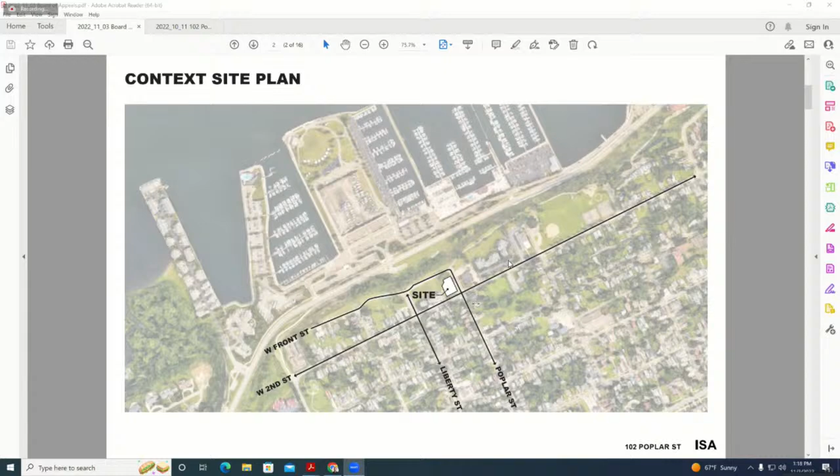I'll give a few slides for context of where the site and property is. This is the location of the site, in the waterfront district between 2nd and Front Street. It is these 4 parcels which have been consolidated. The issue we have is that the northernmost property line abuts this large property marked 400, owned by the Port Authority of Erie.

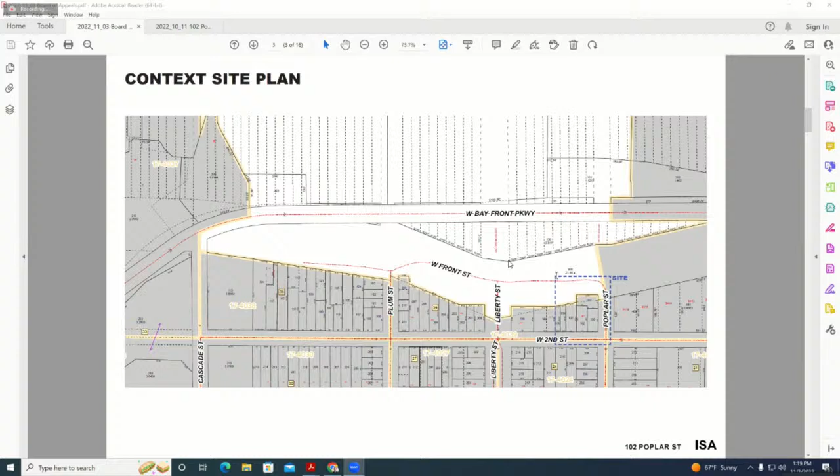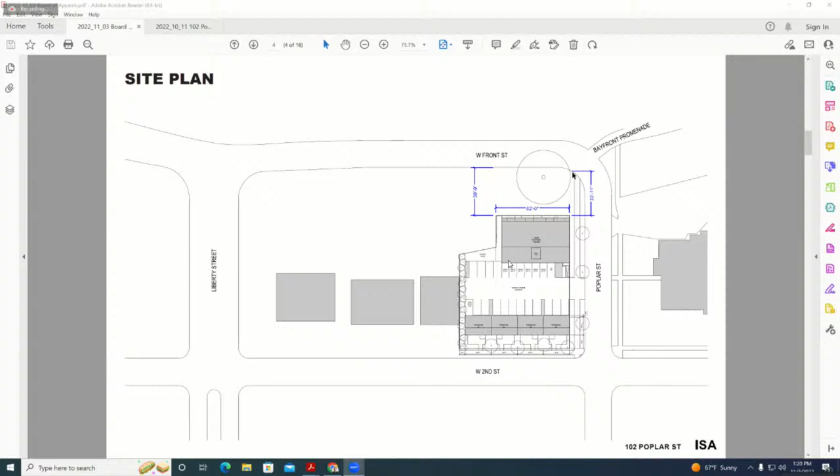So the northern facade that we are looking for the variance for is this lower line. This is a zoning diagram, so it shows the balconies and things like that, but the building itself is 10 feet back from the property line. The other property by the city of Erie is actually this entire area. It's very small, only 39'9" between Front Street and the building property line, and 33'11" from the other side, because this street has some movement to it.

Our argument would be that the intent of the code here is to prevent fire from going from one building to a neighboring building. Since this is an interior lot line in this situation, the intent is that there would only be so many openings available on this building so that if a fire were to be there, it would not spread.

However, we believe it is very unlikely that another building is going to be built here. The area is owned by the Port Authority, it's a very small location. I'll note that the 39'9" is taken from the face of the property line to the actual face of the street itself, not allowing for sidewalks or anything like that. This whole area is mostly used for public use, and there's nothing else built on it.

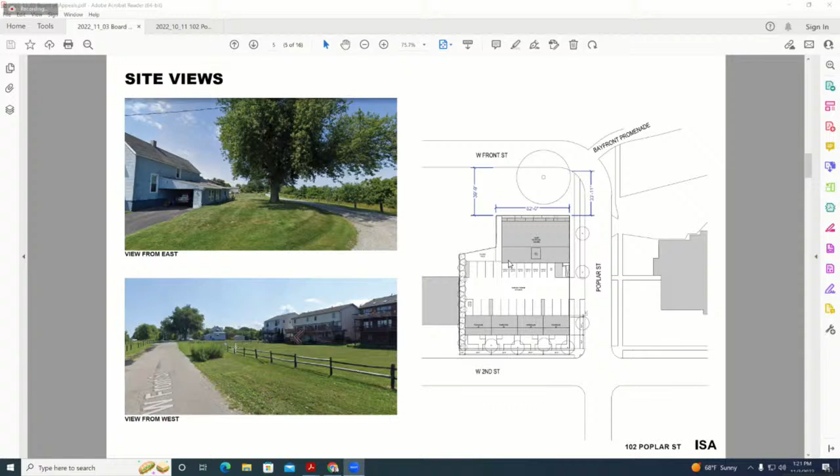This is a view from the west side of the property. You can see all of the other projects. There's a fence here, but nothing built here. It doesn't seem like there's any intended use in this area.

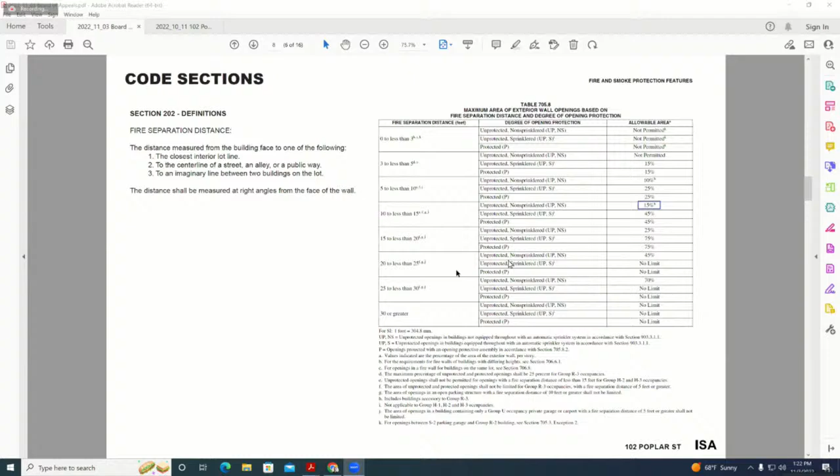I have a few pages from the architectural drawings that will show exactly where the building is. Again, this is the building. This dashed line is the outside wall of the building. Above it there is an eave, but the actual wall where the openings are is in this location, 10 feet away from the property line.

This is the area above where we believe no building will ever be constructed. We dimensioned approximately 74 feet to the center line of the street, give or take, I won't say that's exact. However, the dimension I gave you before, 39'9" from the property line to the street, is taken off the civil survey and is exact. To be honest, if this was anything over 30 feet, there would be an unlimited number of openings allowed anyway.

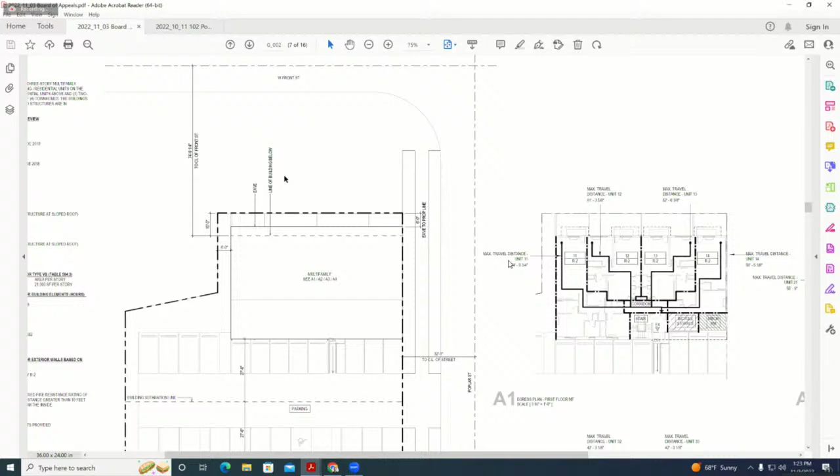This is one of the pages that was given to you, which was reviewed by BIU and was returned as non-code compliant.

This is an elevation of the northern facade, and the number of openings we are seeking is about 40-45% open. We feel these windows are important because they provide a nice view to Lake Erie, and that is the reason why, architecturally speaking, we are seeking these additional openings.

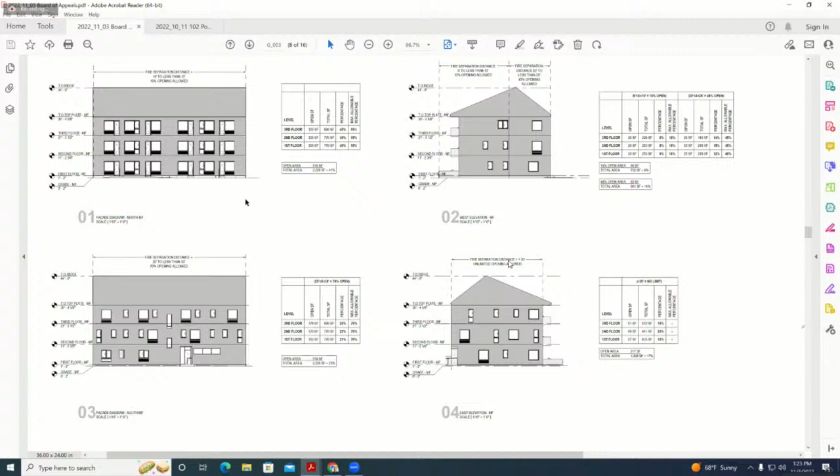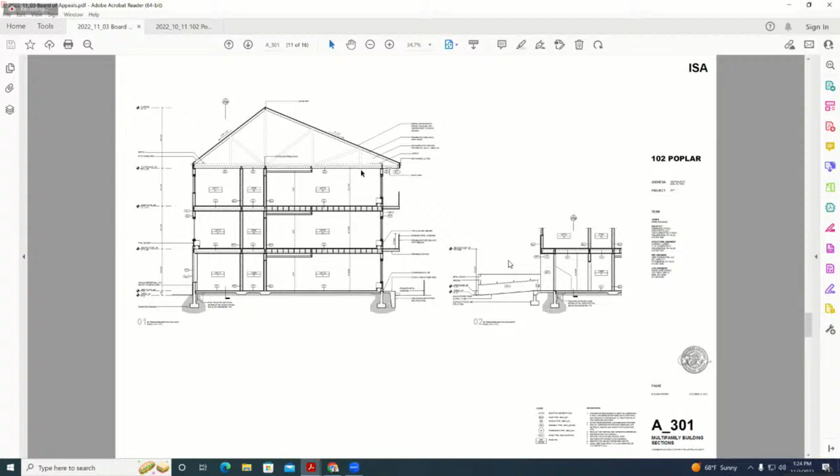I have a number of other images here from the building set, from the permit set, which may not be relevant, but if during the conversation we need to look at them, we'll have them available. This is an image again of the elevation with balconies, and then the last thing that might be particularly relevant is this elevation of the building looking out on the northern facade.

Again, this might not be relevant in terms of the fire separation, but this is what we are looking to have. We feel that this is in line with the intent of the code, which is to prevent fire from spreading from one building to another. And that is the end of my presentation.

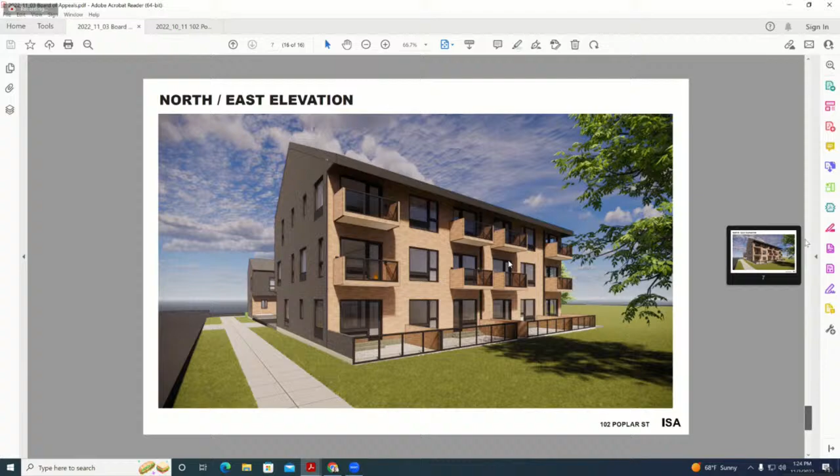Okay, thank you very much. We do not have a representative from BIU present, so I would next ask to hear any comments from the City of Erie Fire Department.

My name is Donald Sauer, and I'm the Chief Inspector for the City of Erie Fire Department. The only question I would have is if they're going to have a fire pump in the building, or is it just going to be domestic water pressure?

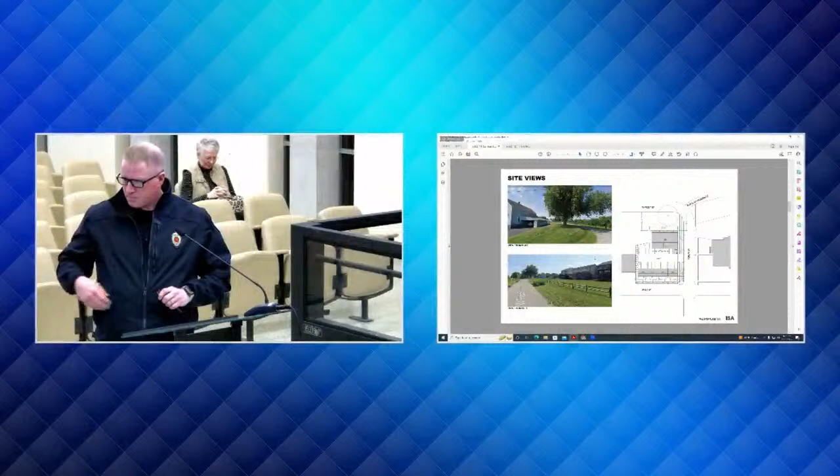I believe that there is a fire pump in the building. We have it fully engineered as an NFPA 13R. I'm sorry, I don't remember exactly if the city pressure is sufficient for it, or if we needed a fire pump in this particular case, but it has been engineered and is being permitted currently as a 13R.

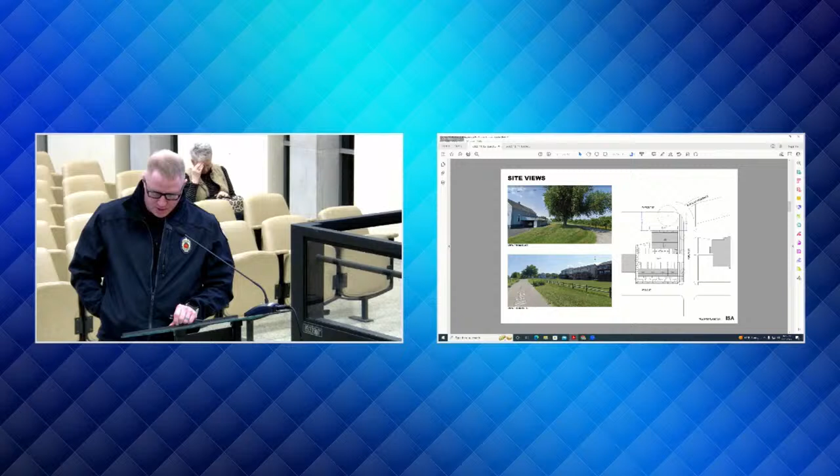Do we know if the Port Authority has a problem with this building going in? What's the Port Authority's take on where he wants to put the building and what he wants to do to it? Have you had any correspondence with the Port Authority that would be in support of your request or against your request?

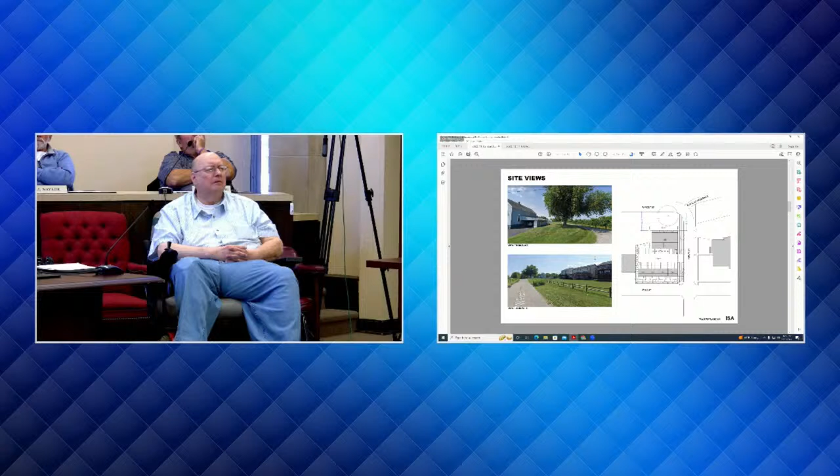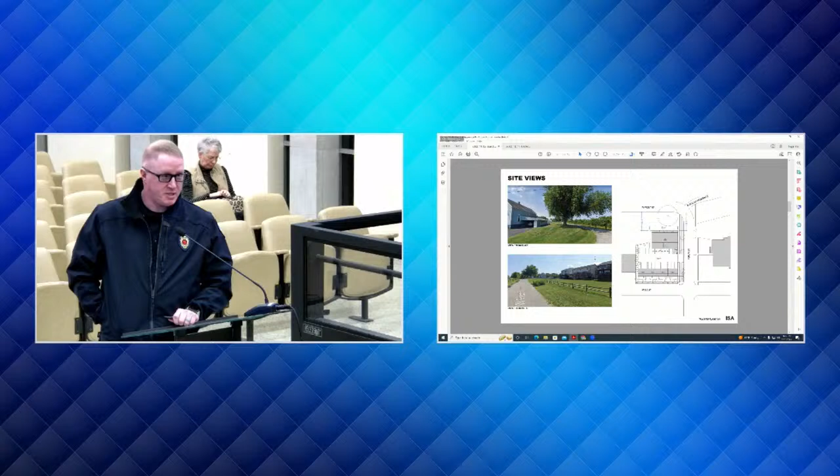No, we have not had any correspondence with the Port Authority. Our only concern would be if the Port Authority would look to build on that area, although the property line area is very small. If the Port Authority would want to do something down the road, but if they're not here to contest that, and if they're putting in a fully sprinkled system with a fire pump, we don't have a problem with what they're doing.

Okay, thank you very much. Any comment from the City of Erie Building Department?

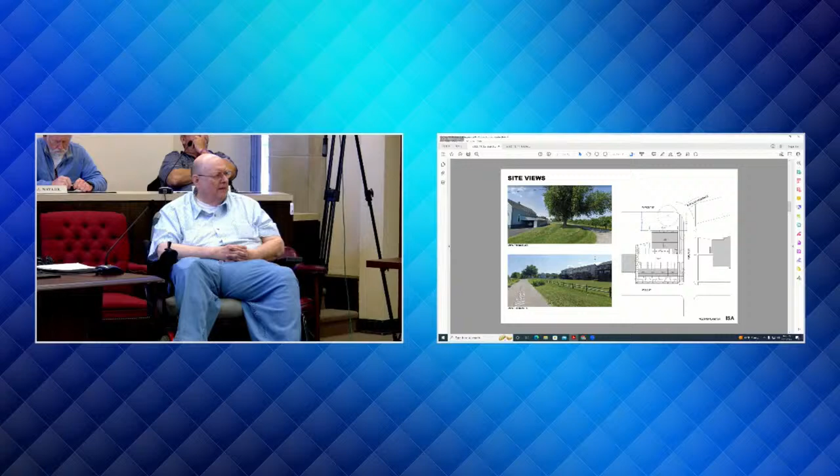Andy Zimmerman, Manager of Code Enforcement, and I will speak somewhat for BIU, not for them, but just to reiterate that Table 705.8, the 10 to less than 15 feet, only allows 15%.

They're asking for 45% opening. In looking at that picture alongside the road, I will say that there is a right-of-way that is required, and I believe it's 15 feet. So if there was to be a building there, it would be limited.

Okay, just to reiterate, you're saying that if they were to build a building there, it would be limited. It would be very, very limited because of the right-of-way on the road. Okay, thank you very much.

Question, Doug Armstrong. Andy, when you say there's a right-of-way, as we're looking at this picture right now, the site views, so where the Port Authority owns would then be the other side of Front Street? Is that what that is? Where the tree's located, just beyond that, is that their property, that's Port Authority property?

Port Authority property. But they could not remove that roadway? Is that what you're saying? Not without council's approval.

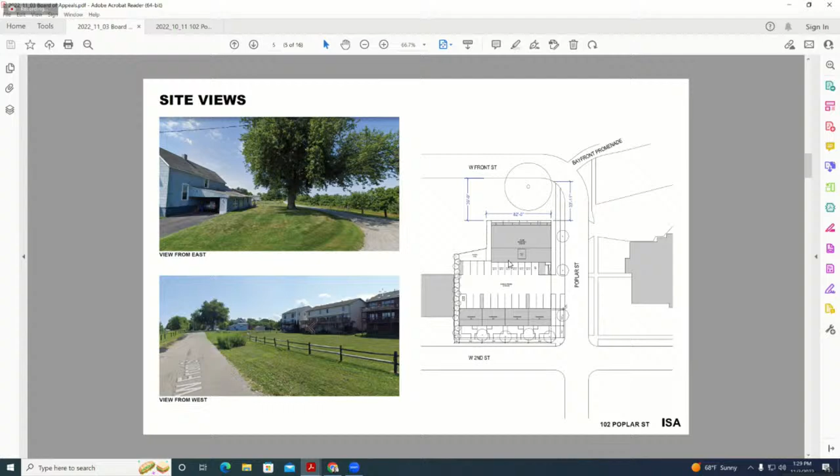And that would then indeed give the petitioners the space they need for the distance between the two buildings, if there were ever to go a building built. They would have to go to the Port Authority and ask for that footage. Okay, thank you.

Thank you. Any questions from the members of the Board of Appeals?

Matt Rose: Just so I'm clear on this, the board is allowed to rule with regards to 3 different possibilities. I don't know which one the architect is claiming we should rule in his favor for.

It's not that the code was necessarily wrong in this situation. There's not been a proposed alternate or substitute. What was the third option? Yeah, the true intent was incorrectly interpreted. The provisions do not apply, or an equivalent form of construction is to be used.

Has this board previously ruled on a similar situation? I thought we have in the past, maybe a couple different ways, so it would not be the exact same scenario. But I thought an early decision many years ago was that if this landowner got written approval from the adjacent property owner that they would not build on that property within a certain distance of their property, that would be allowable then?

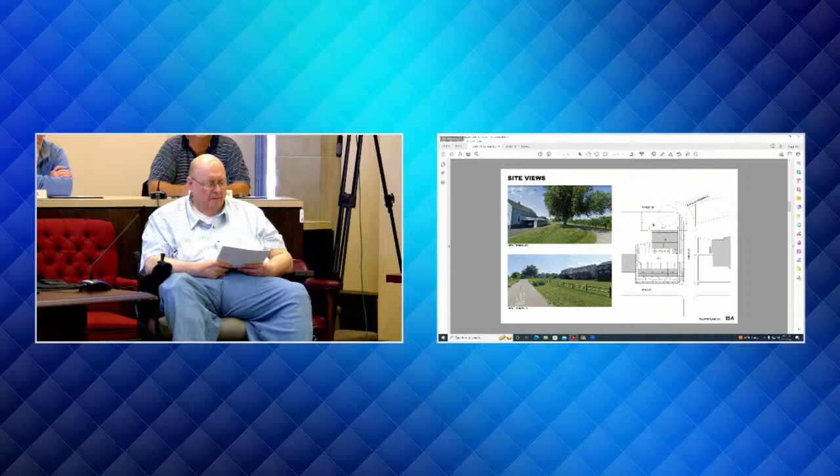I understand what you're saying, that it is up to the Port Authority to build. I'll just say that our argument is that it might not even be possible for them to build on that area because it's so small, especially if you include any required setbacks and any space that would be taken in front of the street. It seems very unlikely that anybody—and there's the tree there—it just seems very unlikely that anything would ever be built there.

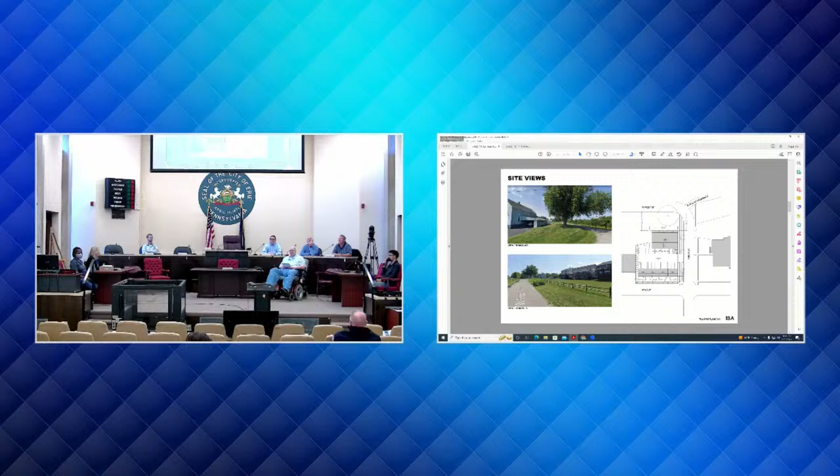Yeah, if there's an alternate construction, for the windows that we have on that face—this building is being constructed as a 13R building. If this was an NFPA 13 sprinkler system, then that would allow us to have 45% openings per the table. We could add an extra sprinkler head above the windows in order to create some extra safety for those windows in the unlikely event that anything was built there.

I think going to an entire NFPA 13 for the building is kind of excessive and far in excess of the building code. But we could make some extra effort at the actual window openings themselves to ensure that they are compliant.

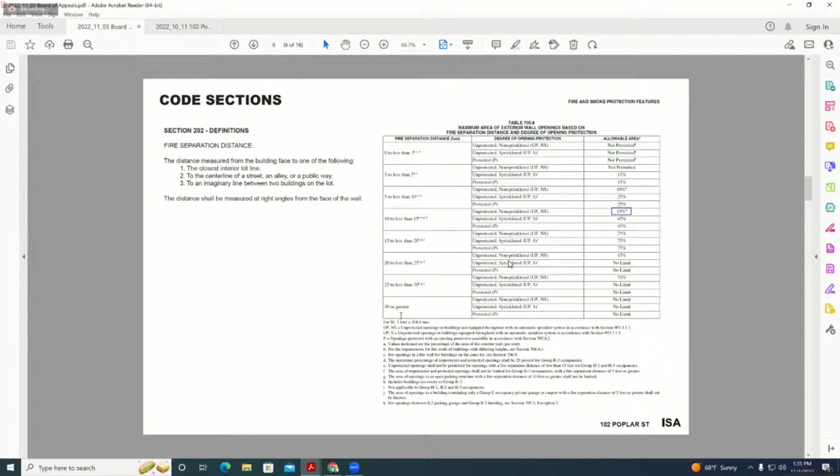Thank you. Any other questions from members of the board? Is a member of the board prepared to make a motion?

I'm sorry, I just wanted to make sure there wasn't anybody here opposing the petition from the public. Is there anybody here from the public that's here to speak against this request? Yes, thank you.

Any member of the board willing to make a motion? Al Naylor: I would make a motion that we accept the building as it is, contingent upon the Port Authority signing an agreement not to build on adjacent property.

Dave Woods: I'll second that motion. Thank you, we have a motion and a second. I just want to confirm with the Deputy City Solicitor that this is something permissible for our ruling. Yes. Okay, I thought it was, but I'd just like to check.

All right, we have a motion before us. All in favor signify by raising their hand. Okay, it appears that the motion carries.